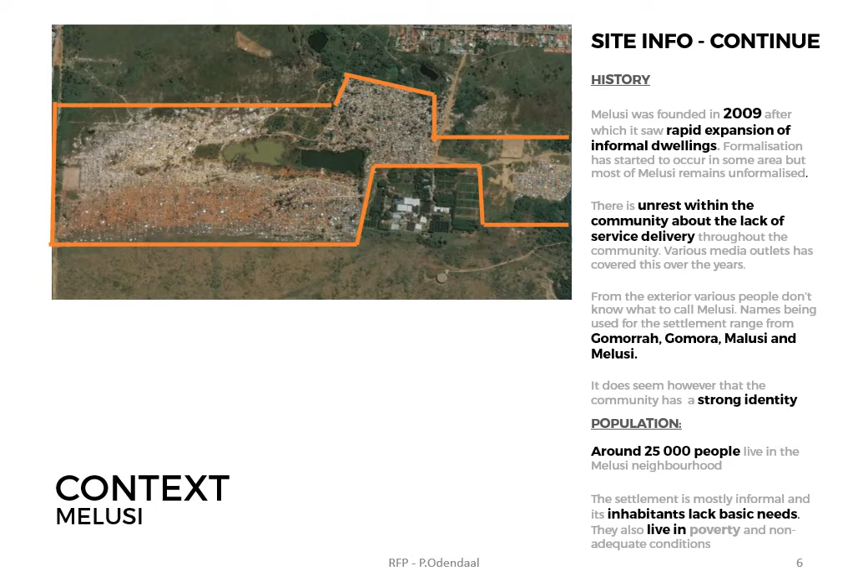Melusi was founded in 2009 and experienced rapid growth since then. The population mostly lives in poverty, and the 25,000 people that live here usually do not have basic services.

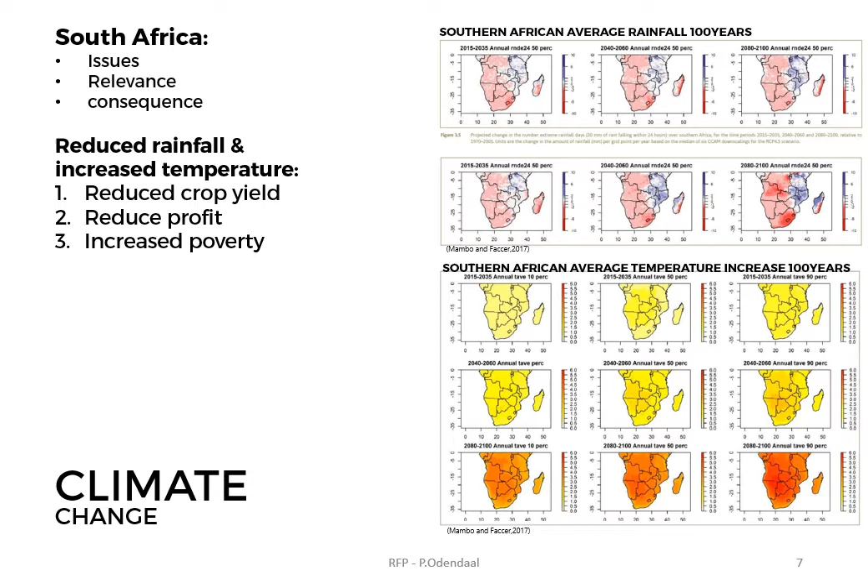Climate change will have various impacts on South Africa. Some of the more serious consequences is the variability of rainfall expected over the next 100 years, with the CSIR showing a reduction into the coming decade. This will impact society drastically, but more so people who do not have the means to adapt to such change.

My theoretical approach is that of the triple bottom line, with the improvement of the trinity of social, economic, and ecological factors being the goal, which in turn will bring advancement for the entire neighborhood.

Initial concept sketches did not resemble at all as the final design turned out, but some elements remained important: the progression from public to private space and various elements drawn that started developing various ideas.

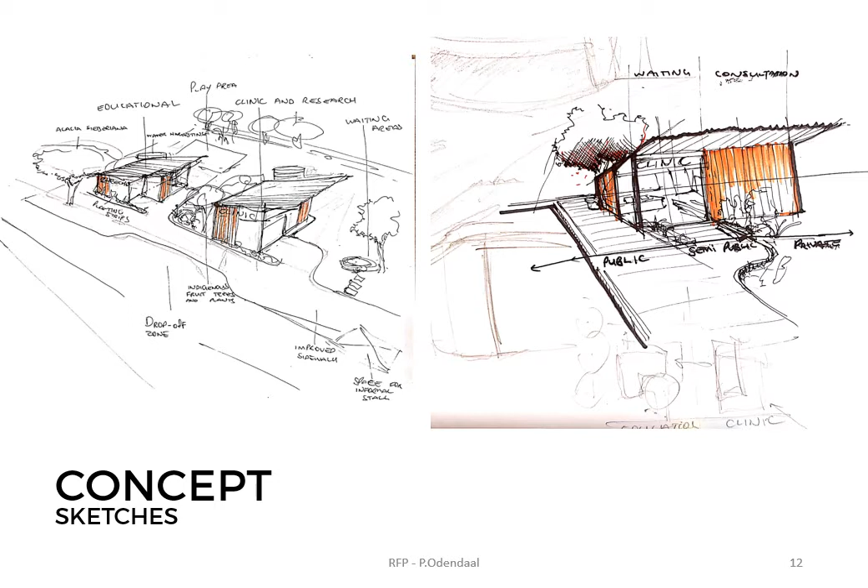My concept approach is that of symbiosis, specifically the interaction between different nodes that improve all parties involved. This is linked closely to the idea of regenerative design, where the goal is not merely to use minimum amount of resources and net zero impacts on the environment, but rather using the site and building to reverse damage and create a net positive impact on the environment.

To further this idea, the triple bottom line is used in conjunction with the idea of symbiosis to form programs that work together for the betterment of the different factors within the triple bottom line. In this case, the program will consist of a clinic and research center, and further a community center that focuses on education predominantly for adults.

I believe the research center can be geared for finding solutions to problems within Melusi and further sharing the knowledge with the community. In simple terms, the sharing of relevant knowledge that can improve lifestyle.

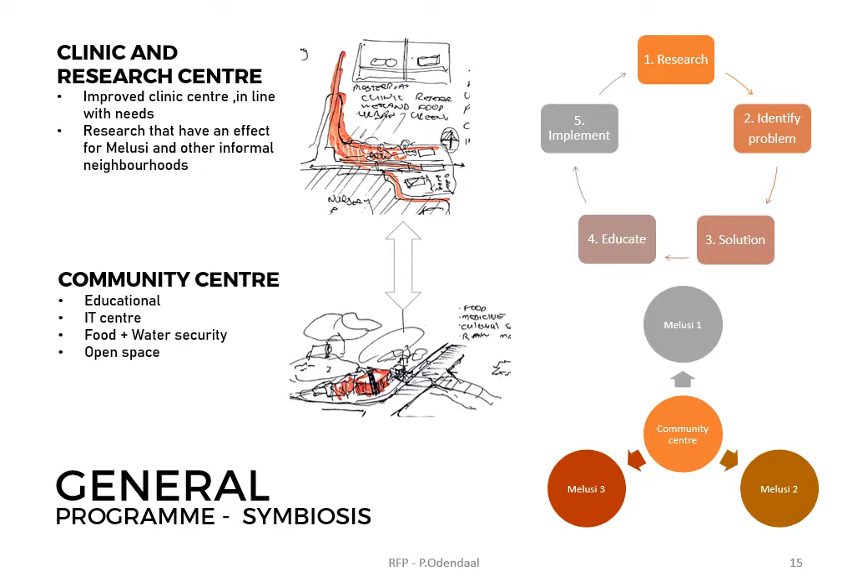Continuing on the concept, the site will have a symbiotic relationship with the development to increase the adaptive capacity of the site and further the community, making them more resilient and more robust to change.

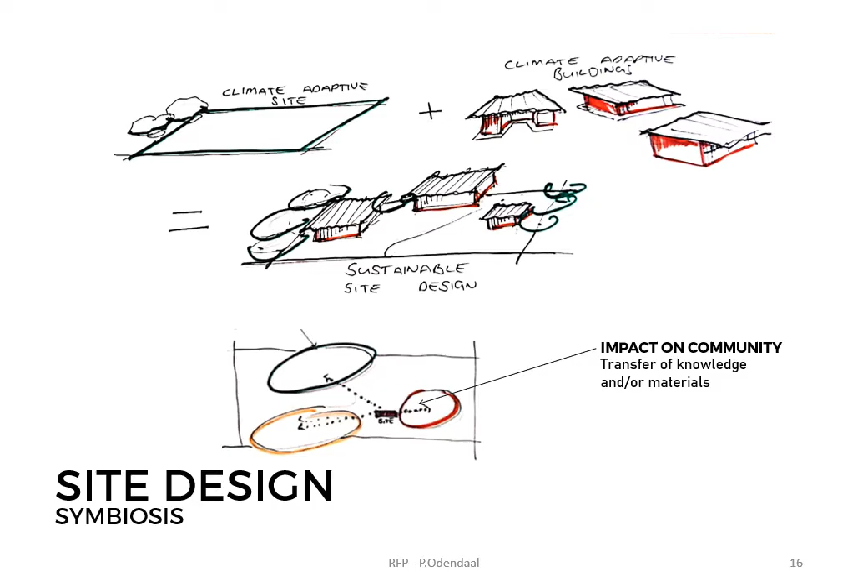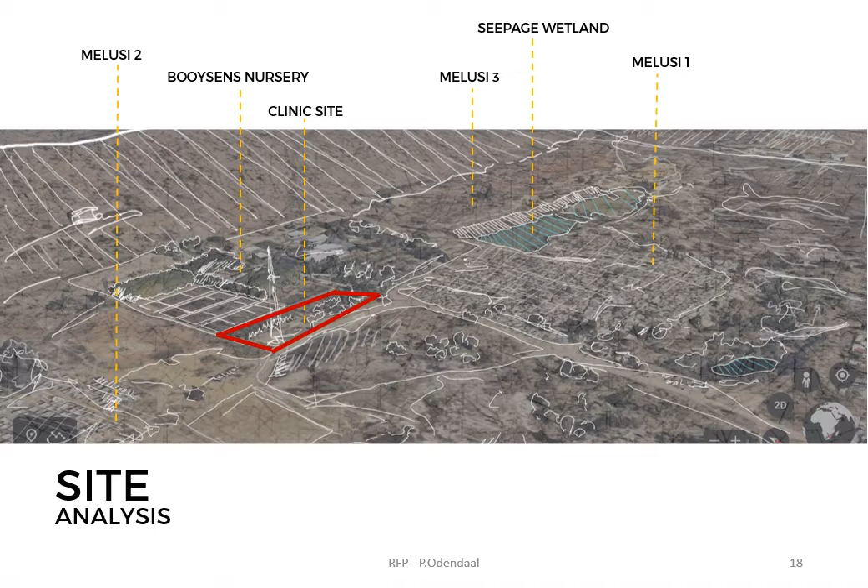The original clinic site was chosen to further develop, firstly because it has a certain familiarity within the community already, secondly it's spaced close to the main road into Melusi which makes it accessible, and finally there is sufficient open space to develop. The site sits at the foot of a hill on the northern aspect with the wind blowing from the north.

The site is fairly exposed except for the western side, which has some mature trees. Main access for vehicles is from the western side. Drainage lines flow north-northeast off the site, and there are footpaths visible in the veld to the north, which indicates some pedestrian patterns and movement.

Massing development started as a massive structure that would house all functions under one roof. This soon changed to smaller structures. It was also important that the clinic sit on the western side of the development because the mature trees would give it some privacy. The community centers then stepped forward against the edge to allow for a more public interface.

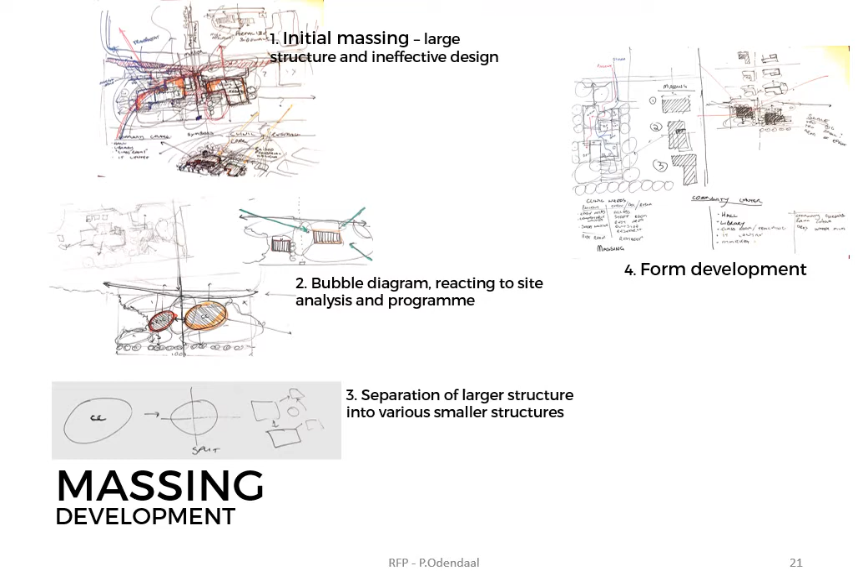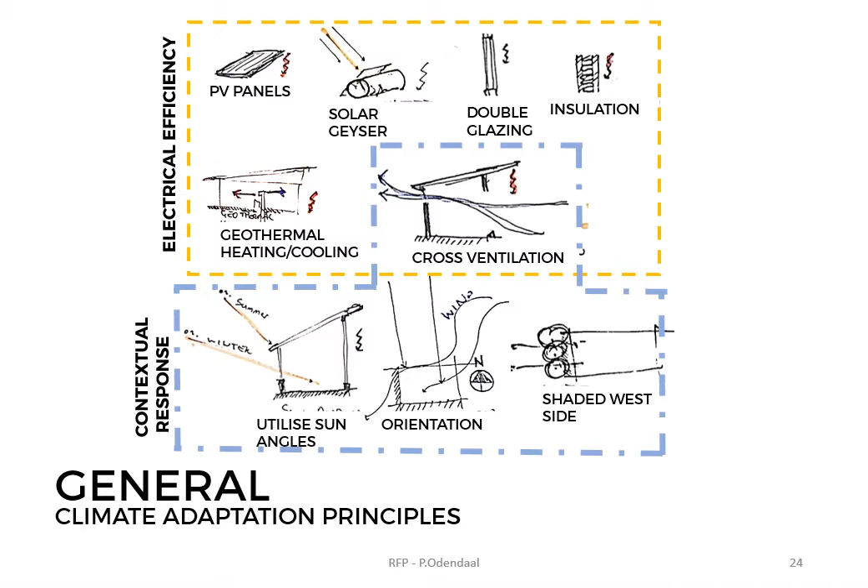Overlaps exist where, for example, cross ventilation is contextual response but improves electrical efficiency. The site itself can further respond by aiding with improvement of microclimate, increased softscaping, equal cut and fill, and finally the harvesting of water, my focus.

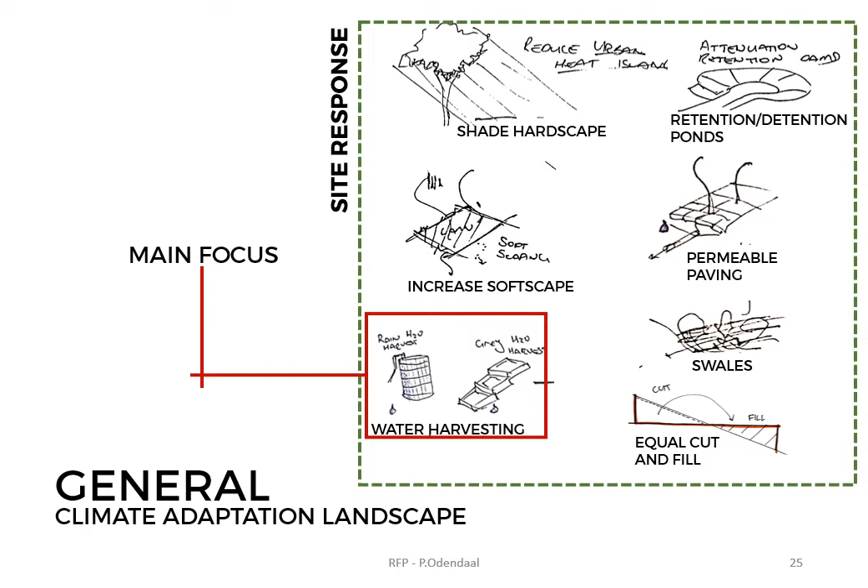One of the precedents I looked at was the Willow School. One of the main factors that I took away from this building is the fact that it used landscape and building to become an educational tool for its learners.

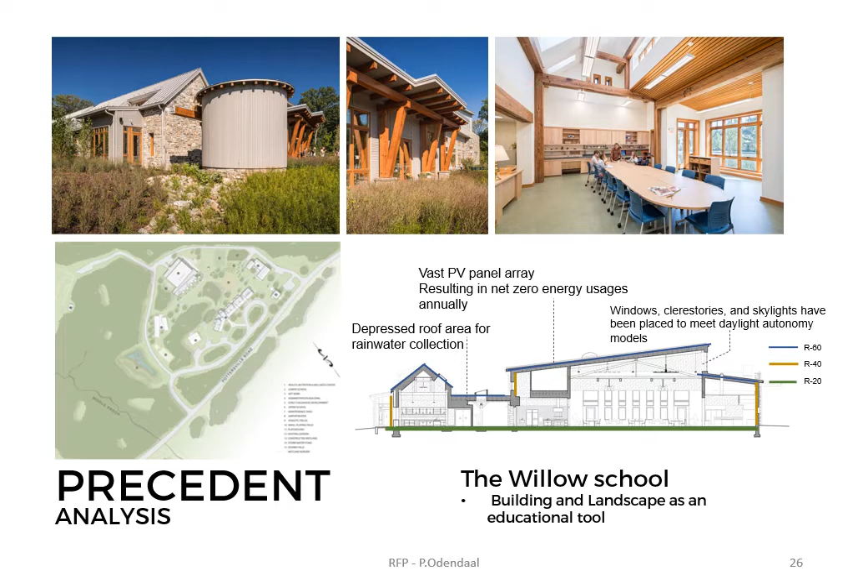Two systems for water harvesting will be introduced, namely rainwater harvesting and greywater harvesting. The harvested water will be filtered through an artificial wetland with the option of introducing a UV filter to make it potable. This will then be used for irrigation of landscapes, supplementing aquaponic systems, and flushing.

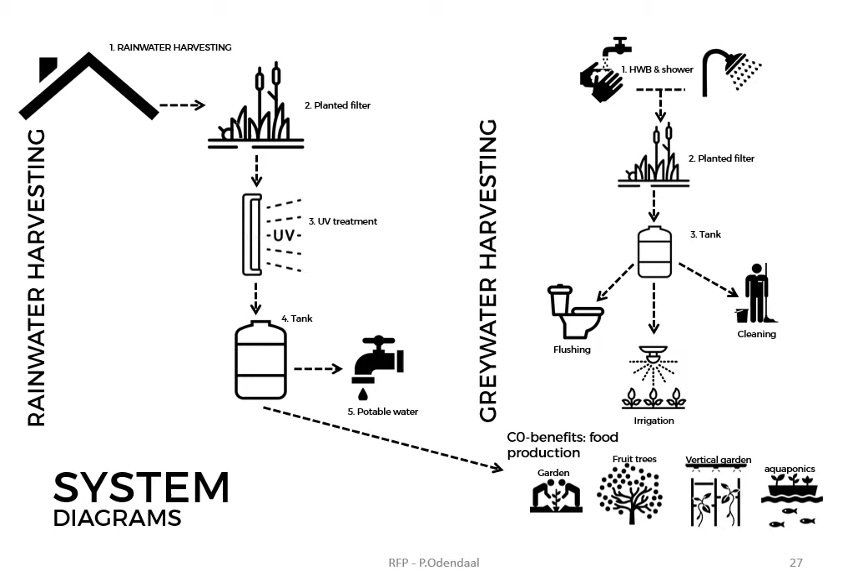Initial concept sketches of the artificial wetland started exploring the process. The water would need to be taken through soils, plants, pebbles, coarse gravel, and sand to be filtered.

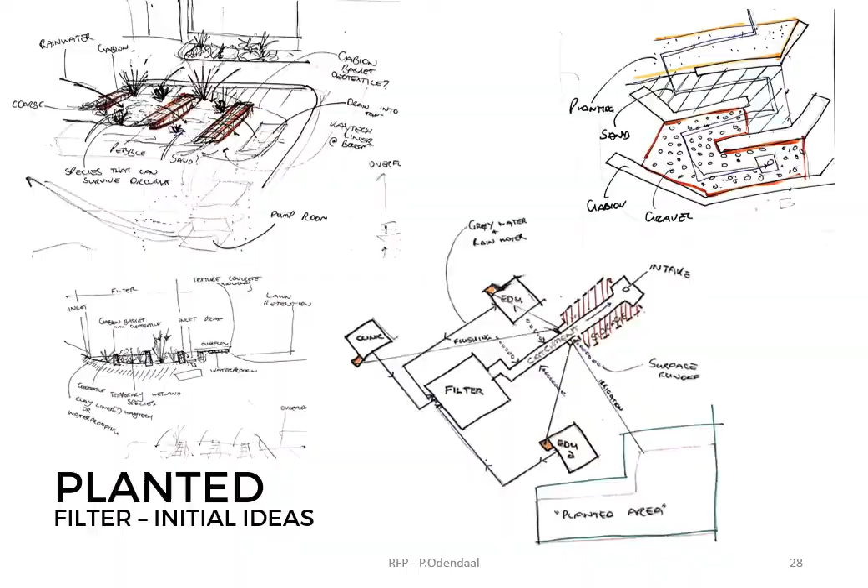Calculations were done to see how much water can be harvested through rain and from roofs per annum. Even with a below average rainfall of 600 millimeters, there would be 445,000 liters that can be harvested in a year. Wetland size will be determined by using a number between worst case and average rainfall in a day.

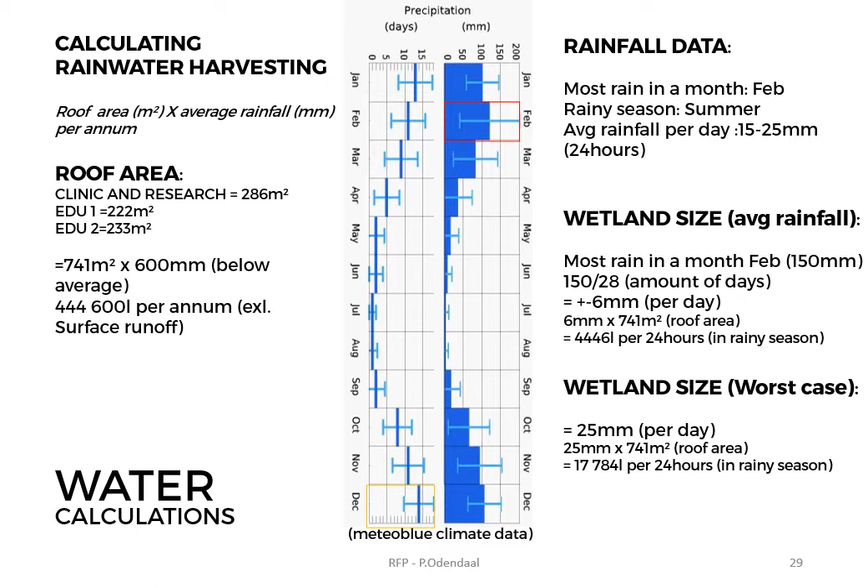I'm, for instance, not worried about flooding. Overflow will be safe and away from the buildings.

Here are some initial design proposals. Please refer to the addendum for some additional process work.

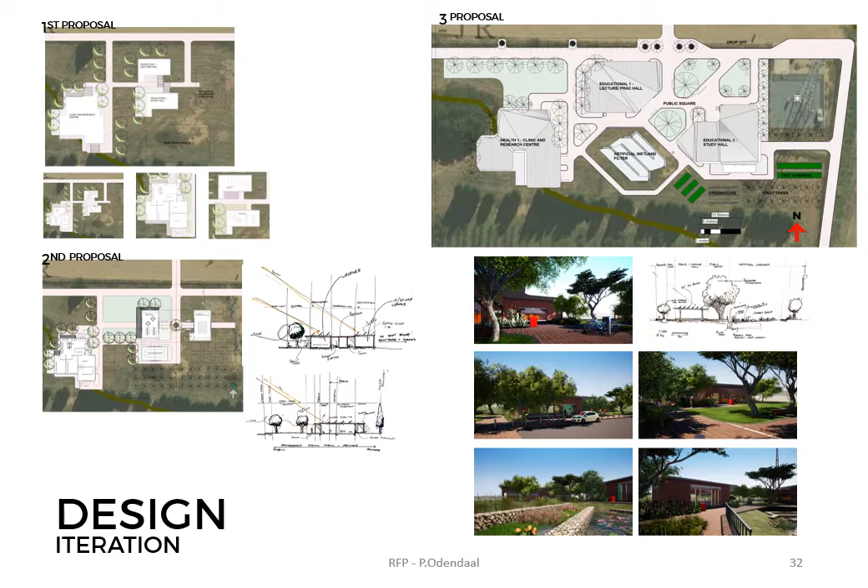The clinic and the research center sit to the western side of the development and again step back from the edge to create more privacy.

Educational 1 becomes a large hall practical room on the street edge. This will be where most teaching will happen, but it's also a multifunctional space which can house various programs and functions.

Educational 2 is to the east of the development, and this is the study IT hall where most of the learning will happen. This gives the community access to the internet and resources.

Out of this building is a typological garden and plantation area, together with a greenhouse, all used for teaching how to grow trees, vegetables, fruits, etc.

The artificial wetland is in the middle of the development, and from this a catchment water feature stretches to the lowest point of the site in the northeast corner.

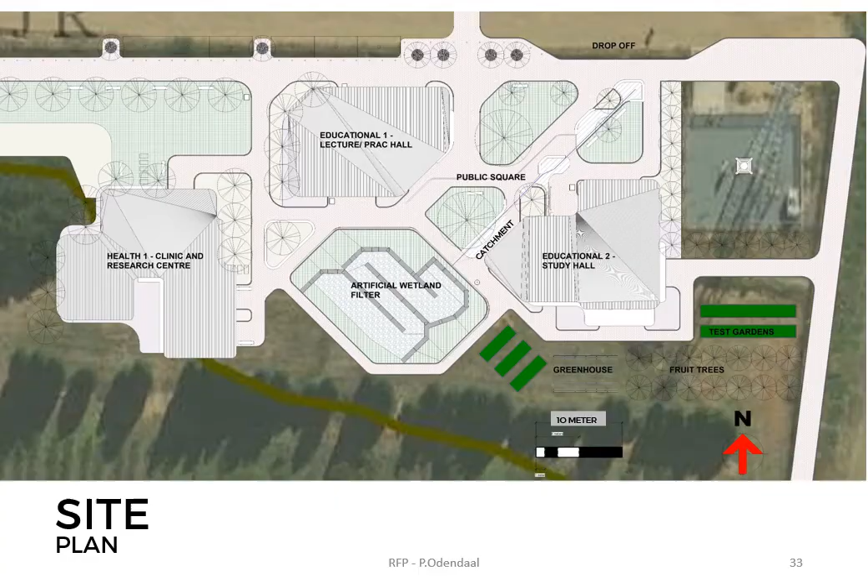The clinic and research center uses spill-out space to create comfortable waiting areas both inside and outside. Various areas are created as open space and planted.

Studies done by Hall and Knuth have shown that such spaces reduce stress, decrease depression, enhance memory retention, and provide greater happiness. This is how the environment can improve social aspects.

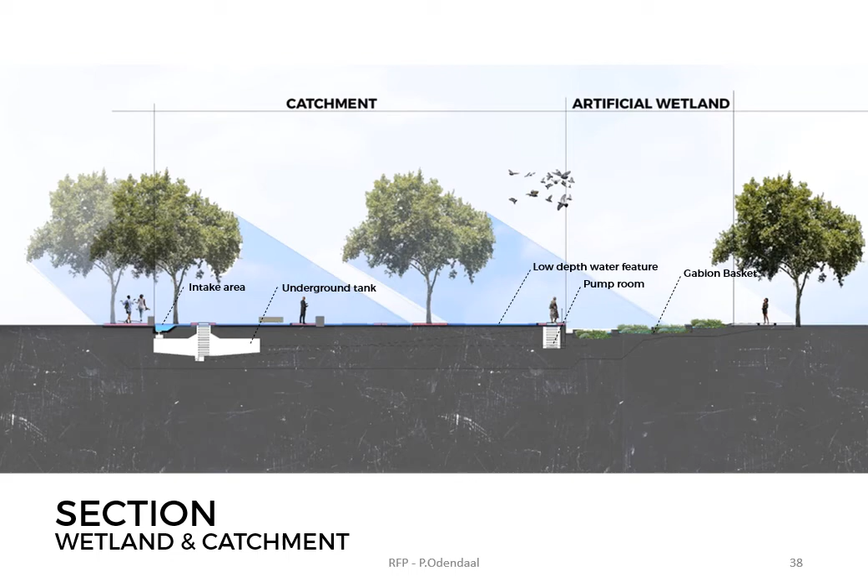The artificial wetland and catchment work from the bottom left to the top right, going with the slope of the site. The catchment area is shaded as much as possible to avoid loss of water through evaporation.

Filtered water can be pumped directly to storage if need be.

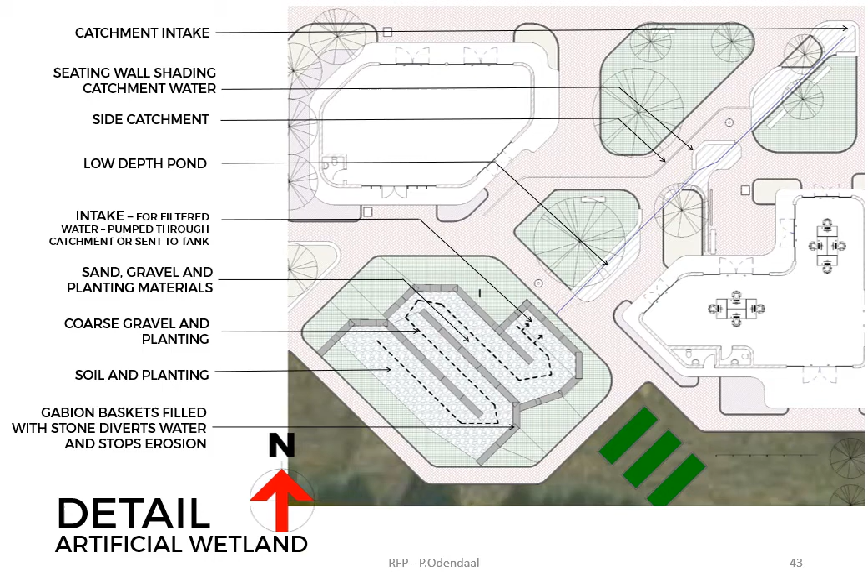The wetland will live off rain events and further be supplemented by grey water throughout the year.

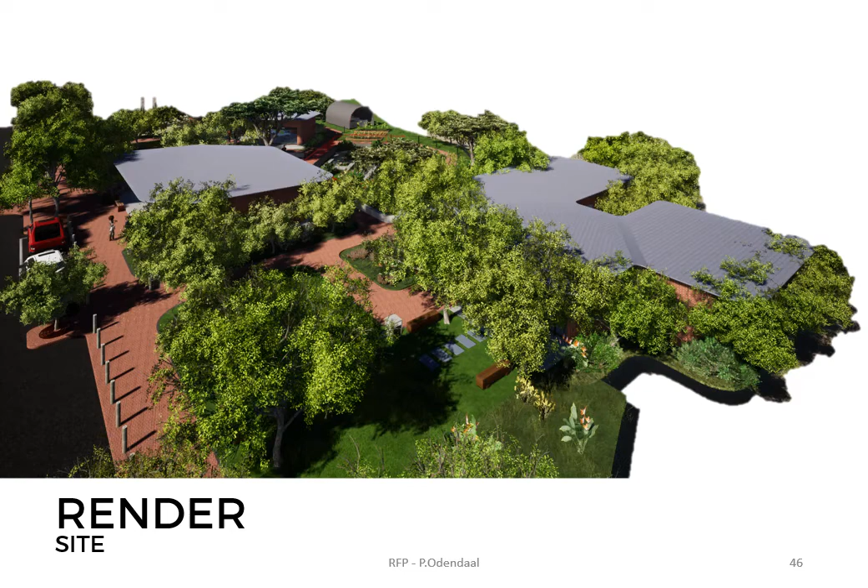It's important to note for this render that I did not add photovoltaic panels on the roofs, and forgive me for not adding more of the Melusi context around the site.

By focusing on water harvesting, the community will have a buffer in times of scarcity. Further, the co-benefit of food production allows for supplementation of diets within the community.

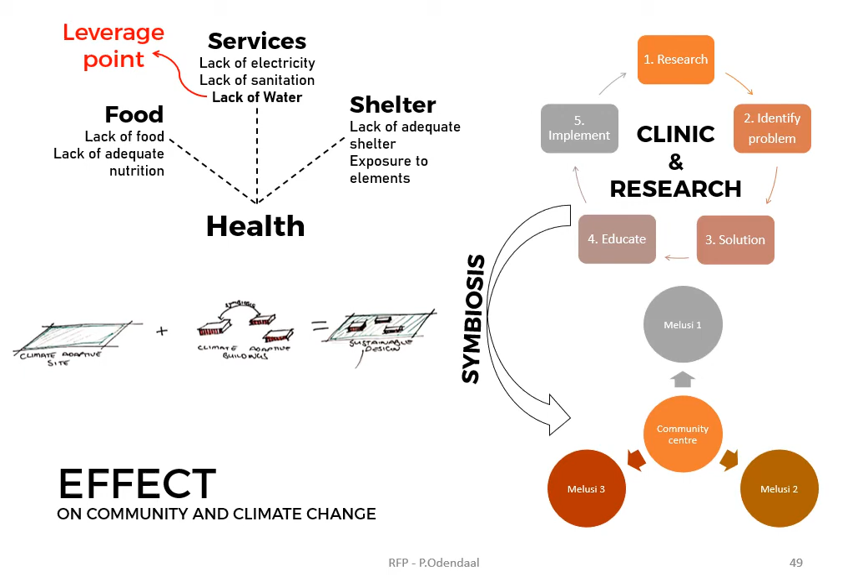The clinic and research center will then work in a symbiotic relationship with the community center to allow for people to adapt, mitigate, and become more resilient to climate change and hopefully other challenges that might arise.

The effect of the theoretical approach is positive. The only place where I feel the development lacks is that it does not directly impact the economy for the inhabitants of Melusi in a profound way.

It only indirectly affects economic factors for the clients by the structures on site being more effective in terms of electricity and water consumption. Materials will then be sourced locally and labor-intensive construction can be employed to have more people working on the site.

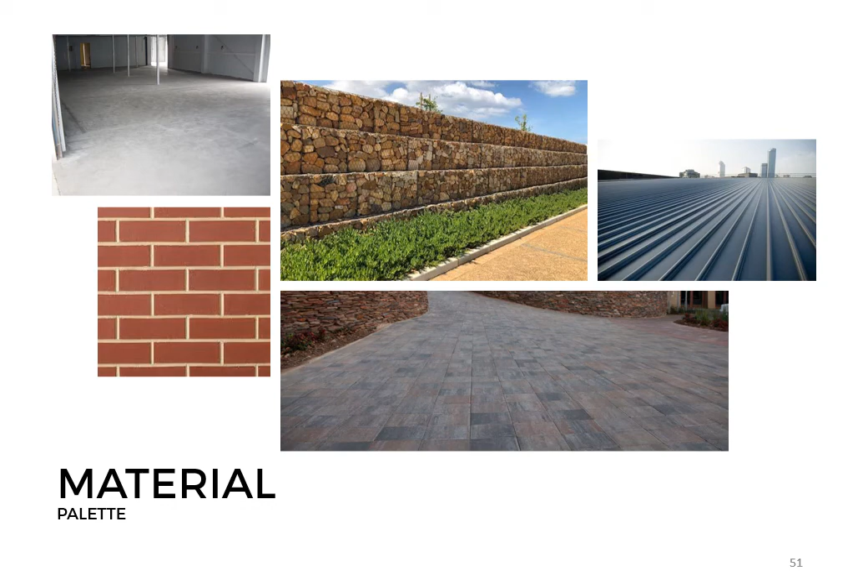The softscaping will have various hardy indigenous species that contribute to the biodiversity of the site and are well adapted to this climate and vegetation unit.

By making development regenerative, adaptive, robust, and resilient, it creates a buffer for society. This will be a constant problem and challenge for the architectural profession throughout our lives.